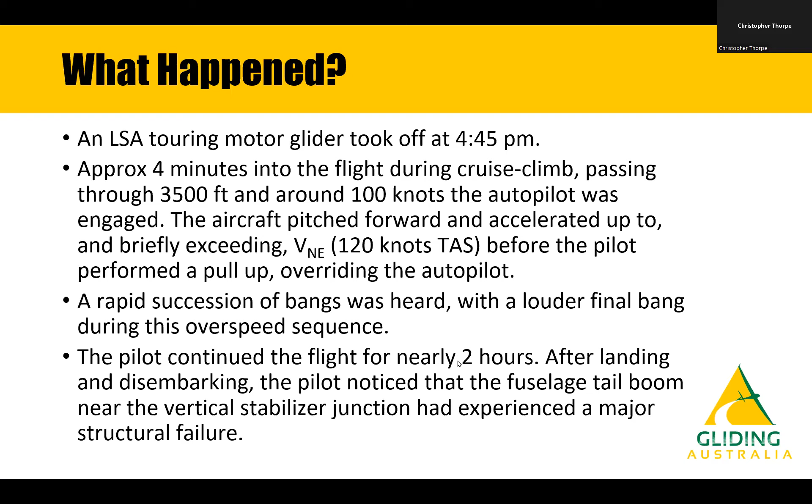The pilot did carry out a controllability check and decided to continue on the flight for nearly 2 hours. Once they landed at their destination, the pilot noticed that the fuselage tail boom near the vertical stabiliser junction had severe structural damage.

There's some photos from the accident report. The right-hand side of the aircraft is on the left-hand photo, so you've got a 45-degree diagonal tension crack, and there's compression damage on the port side on the right-hand photo. There's a little bit of damage that's hidden under the tail dolly on the left-hand photo, and the seam down the centre line just under the leading edge of the root of the fin has been split open as well.

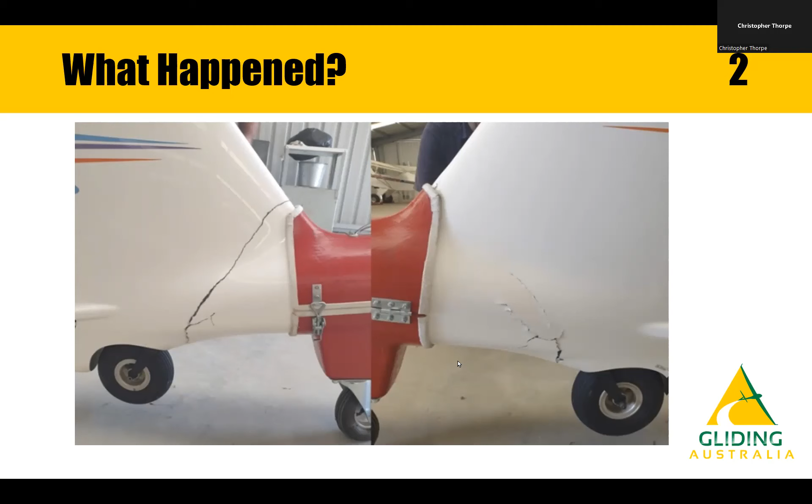So the sequencing: we have a lot of good data points from the autopilot, which also acts as a flight data recorder. Again, very unique in terms of sailplanes in Australia, that we have quite a large amount of this information, including control inputs.

At 16:45:08, the aircraft reached its peak speed of 121 knots. 2 seconds later, the pilot had reacted and pulled back on the control column, wound back the throttle, and reduced the speed. At this time, the aircraft yawed left. The autopilot applied right aileron, which was partially overridden by the pilot, and there were a number of bangs heard. Now, in the accident report, the precise timing is unknown. But I think we can nail that down to being at 16:45:10, or just a fraction after, and I'll show you where that occurred later.

After carrying out the controllability check, the autopilot was re-engaged and the flight continued. However, the pilot noticed that they had to continuously apply right-hand rudder to maintain straight flight from this time onwards.

Now, the pilot had only flown the aircraft a few times previously, so they weren't particularly experienced with using the autopilot and these long-distance flights. The aircraft landed safely at 6:36 p.m.

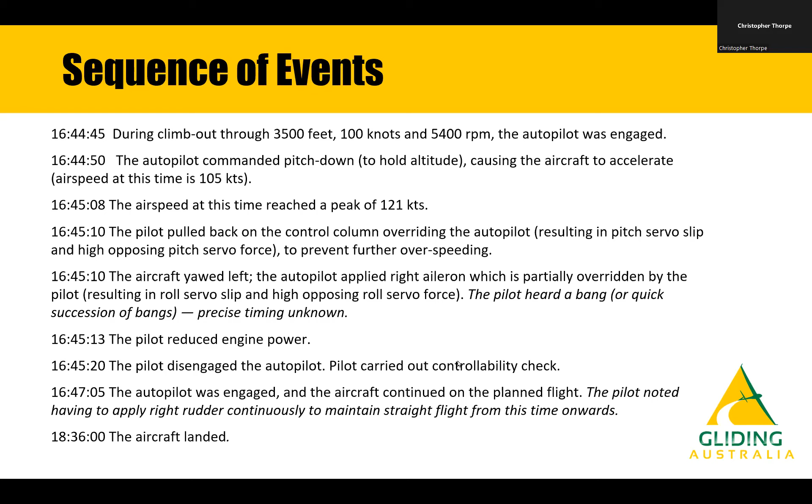So the results out of the investigation: the right-hand side of the tail boom failed in tension with that large 45-degree crack. The left-hand side of the tail boom had a partial failure in compression, and there was cracking to around 70% of the circumference of the tail boom.

The structure retained pretty good vertical stiffness, so elevator function wasn't adversely affected. But the lateral stiffness was very poor. The aircraft was quite flexible in the left-right direction, wobbling of the fin. There was video recorded in the cockpit during the flight with a 360-degree action cam, and there are periods of that flight where you can see the vertical fin physically wobbling left and right.

Now, there have been a number of flutter events that occurred on similar models from which this aircraft is derived. There's certainly at least one potential flutter event that occurred on this particular aeroplane, where unknown vibration occurred at high speed, and there are two other events which were attributed to the caps of the air brakes vibrating, but there might be something else going on in the background there as well.

Again, unknown vibration at high speeds. The speeds that all this occurred at are very similar to the speeds at which the flutter event took place.

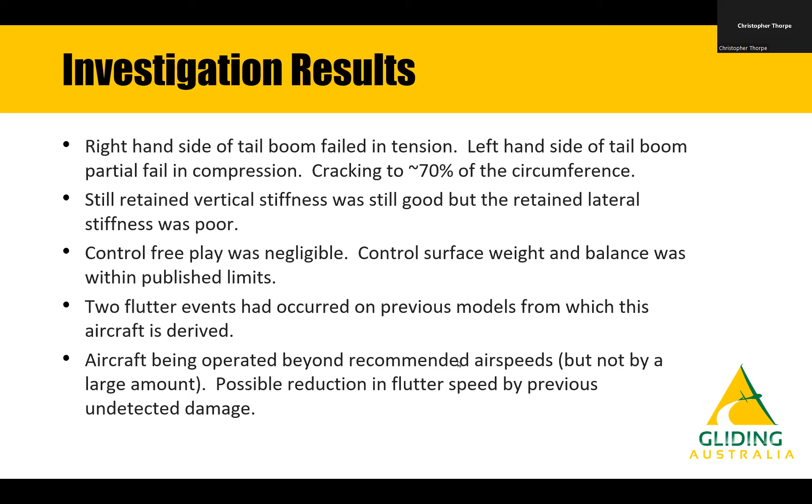So the recommendations out of the report are we should seriously look at the airworthiness of this aircraft type and the flutter events with the other aircraft. We don't have any details of those. They occurred outside the country.

Pilots should be advised that when an in-flight event occurs resulting in observable changes to the aircraft handling characteristics, the flight should be aborted immediately. I'll also add, if you hear a series of bangs in the airplane while you're flying, you should be seriously thinking about landing after that.

One of the features in the autopilot system did allow a maximum airspeed to be set, and that was not set in this particular example. In that case, the aircraft, as it approached VNE, would have done an automatic pull-up to try and prevent going through VNE.

The last recommendation out of the report was for the GFA to raise pilot awareness of flutter and to enhance their understanding of what this is and what can lead to this phenomenon. This is what this webinar is partly about.

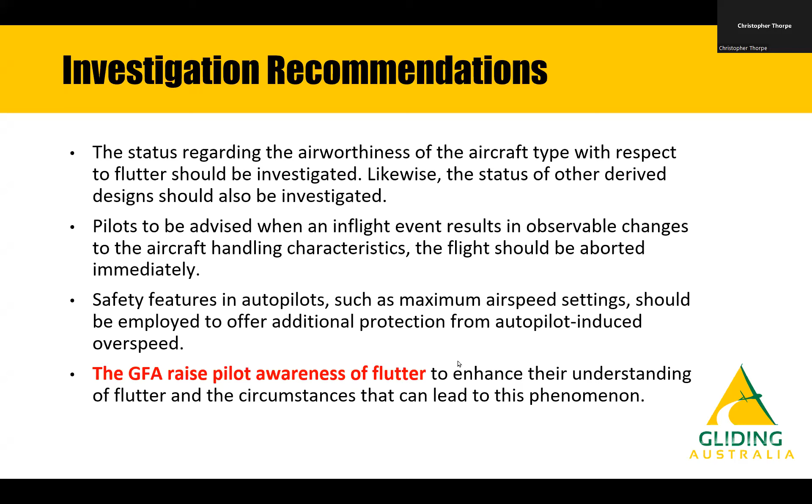So what the hell is flutter? Well, it's also known as the field of aeroelasticity. You can go to a technical library and get whole textbooks written on the subject of aeroelasticity. It's a very complex subject, and for the purposes of tonight, I'm going to be simplifying it greatly and making some generalizations. If you want to go deeper into flutter, there are quite a few good books written about the topic, and you can do your own research in that area.

But broadly speaking, flutter is an uncontrolled oscillation or vibration of the aircraft structure or a control surface in flight. It can affect anything with a hinge on it, so ailerons, elevator, trim tabs, rudders, flaps. It can affect wings, vertical tail, horizontal stabilizer, and even the tail boom under particular circumstances.

Every structure and each control system will have a frequency that it will want to vibrate at naturally. This is called resonance. And when you get that, you have very low damping effects. The structure wants to vibrate at that frequency. And mathematically, that frequency is affected by the distance of the center of gravity of that item from the point it's either rotating around or flexing around.

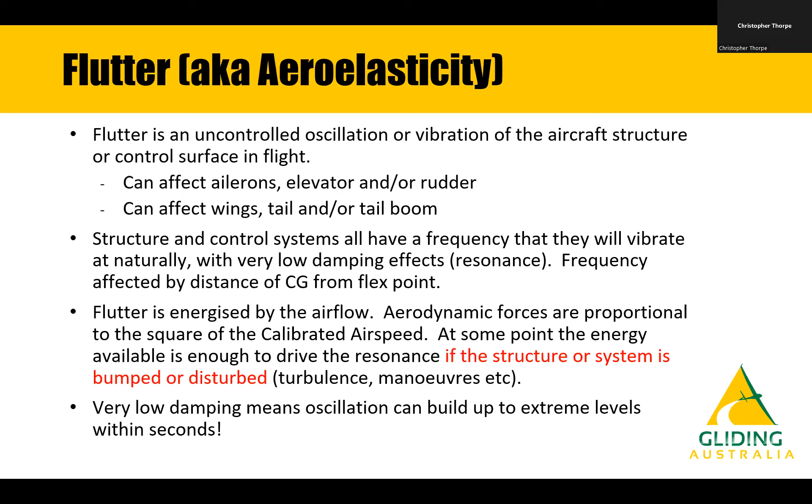An example of this came out of the Phoenix with the autopilot recording. This is a recording of the lateral acceleration as felt at the center of gravity. So it's not the accelerations being felt at the tail boom, it's at the center of gravity. It's not a particularly high resolution recording. It's probably only recording a data point every half a second.

To get a really good recording, we want to be recording maybe 10 hertz, 10 times a second. If what I think happened, we're probably seeing a resonance of around 3 to 4 hertz, and so you want at least 8 data points per second to capture that nicely. But we can see some background vibration or oscillation happening at around that 16:45 mark. The time major ticks are at 10-second intervals.

So at about 16:45 and 7 seconds, this background oscillation ramps up dramatically. And just after 16:45 and 10 seconds, there's a really big kick. And I think this is where the tail boom started to fail with the break in the structure. But you can see just from this very rapid buildup of vibration from the flutter.

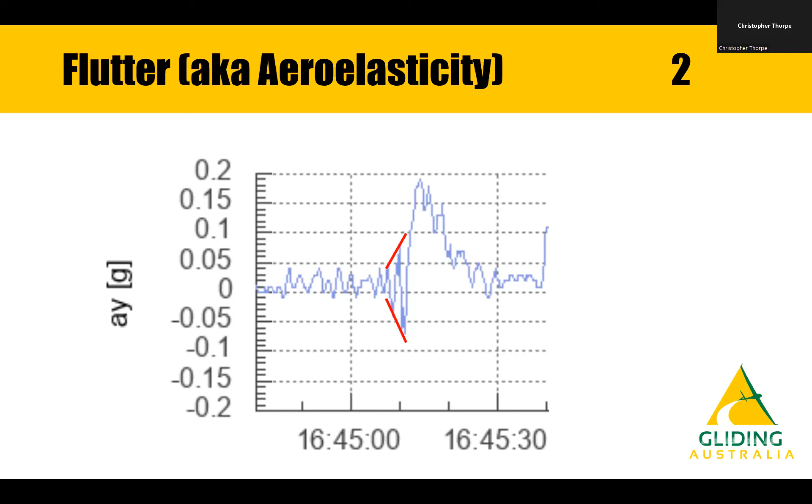Flutter and aeroelasticity covers a whole range of phenomena. We're going to simplify it down to the most common forms we're most likely to find within sailplanes. The first one is control flutter. This is the one you're most likely to encounter. It can affect anything with a hinge. So ailerons, elevator, rudder, flaps, trim tabs.

It can be caused by the control surface having the centre of gravity too far aft. So as you move the centre of gravity further away from that hinge point, you're lowering the frequency. The speed at which flutter will onset will occur sooner. You can have hinge free play. This allows the hinge point to bump up and down and gives an extra degree of freedom in the movement of the surface.

There is footage of an F-117 stealth fighter on the internet at an air show in the US, where it's doing a high-speed pass along the runway, where there's a brief buzzing sound, and then I believe the left outer wing snaps off. The aircraft does a series of snap rolls before the pilot finally ejects blue side up and safely lands. The aircraft then goes and crashes into some houses further away from the airport.

That was caused by the wear and tear of worn bolts in the aileron hinges. So it wasn't actually hinge free play in terms of the pivot, but the hinge itself, the mounting bolts, was being allowed to slop around and move around. And again, that buzzing noise was the aileron fluttering, and it lasted just under 3 seconds before the wing failed.

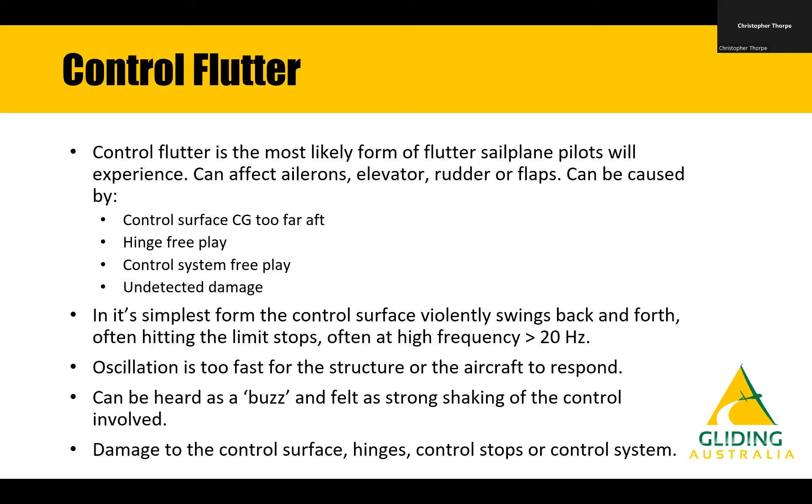As the rudder flaps, for the sake of argument, to the left with a large deflection, it's going to force the fin over to the right. As the fin bends over, it's going to start twisting nose to the back to the left again. That's going to increase the angle of attack and start trying to force the fin back to neutral.

However, by this stage, the rudder is now swinging back towards the right-hand side, and you get the situation not only where you have the fin bent over to the right with an increased angle of attack trying to return it, you've got the elastic forces of the structure trying to return it, and the rudder's now trying to return it as well. So this accelerates the fin back hard the other way, and it overshoots.

So you end up with the fin bending way across to the left, the rudder's to the hard right. It's twisting back around, which decreases the angle of attack. It's trying to get the airflow to drive the fin back to neutral. And the rudder still keeps on swinging around till it gets hard over to the other side.

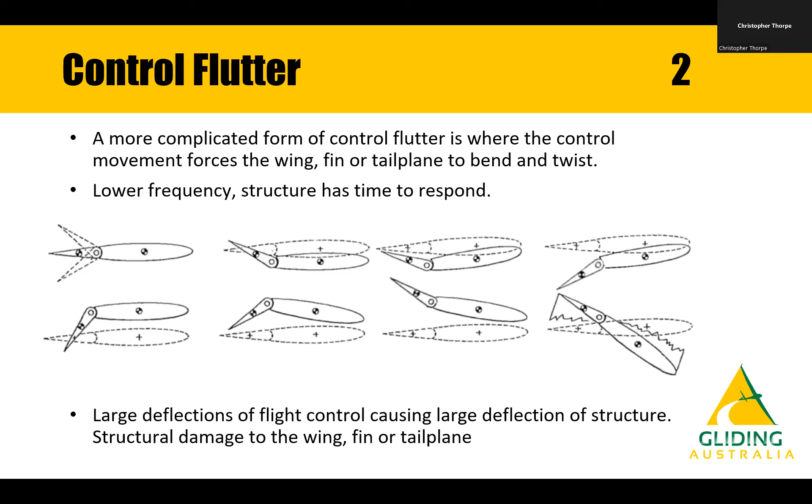We can also get another form of flutter. For the sake of argument, we're going to call it wing flutter, but it can also be applied to fin or the tailplane. Not so common to experience it in sailplanes, but we'll talk a little bit further about what happened to the Phoenix. I actually think it was something along these lines that happened to the fin on the Phoenix.

A lot of these structures on the aircraft can be referred to as what's called a cantilever beam, where it is exactly the same as if you have a ruler on the desk and you've clamped it to one end of the desk with your hand, and you've got a fixed end at the root end, and the free end is allowed to move around at the tip.

So what we refer to as primary wing flutter is both wingtips bouncing up and down together in a symmetrical pattern, just like you'd twang a ruler on a desk. The fuselage would end up bouncing up and down slightly in reaction. Mr. Newton had these laws of motion. One of them says every action has an equal and opposite reaction. So as the mass of the wing is bouncing up, it's trying to drive the mass of the fuselage and tail down. So you end up feeling in the cockpit a lot of vibration, like you're driving over a corrugated road.

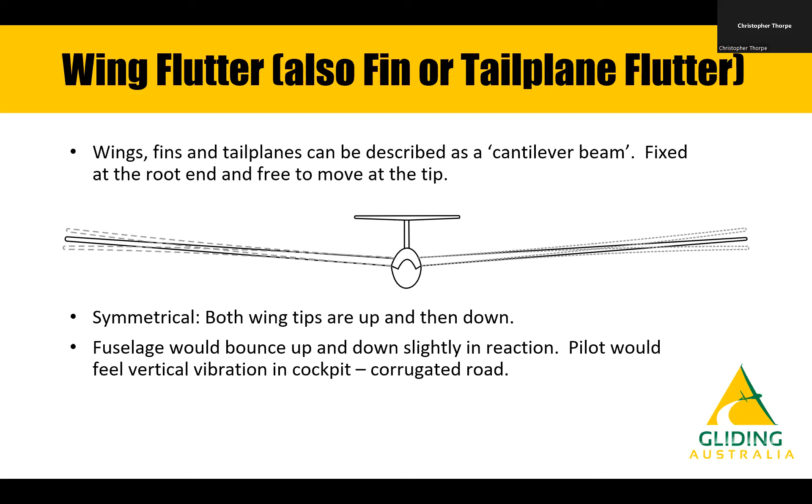And that's going to be in the order of frequency that you do your wing shake test at during the annual inspection. That kind of frequency is driven largely by the bending forces on the wing. So the bending stiffness of the wing, the centre of gravity on the wing. It's all about bending in that mode.

You can get a more complicated version where the controls interact with this. Now, I've used the same diagram as before, and it's pretty similar, but the real difference here is it's the surface, the wing, fin or tail, which is driving the motion, and the control surface is just along for the ride. So what I mean by that, again, working from top left to right, bottom left to right.

On the second image, let's say it's a wing, it is bouncing down and it leaves the aileron behind. The aileron has inertia, it wants to sit where it was in space. So it flaps up. It then, of course, helps drive the wing down a bit further, causing a fair bit of torsion on the wings, particularly at high speed. You get a lot of torsion from the ailerons.

And the cycle repeats. You then get the wing bending down, with a nose up twist to it, so that's getting an increased angle of attack, which is driving the aerodynamic forces to help drive the wing back up, along with the elastic stresses on the wing. As it starts bouncing up, the aileron has again got inertia, it's still travelling downwards, it flaps down a bit.

And of course you've got that situation where you've now got, on the top right hand side image there, an increased angle of attack. You've got the elastic forces of the wing trying to pull the wing back up into shape, and you've got the aileron deflected down, increasing the aerodynamic forces, forcing the wing back up, and of course it overshoots.

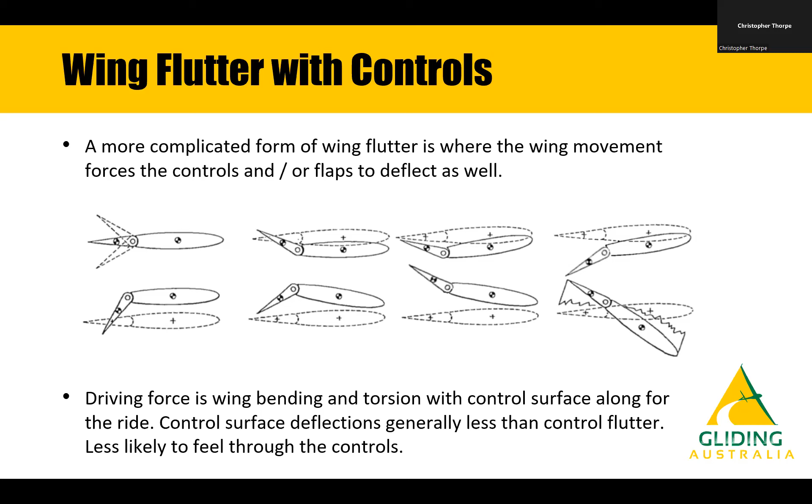What you end up with, particularly with the ailerons, is this anti-symmetrical mode. One wingtip is up and the other is down, and you've got that bit of an S-shape or sine curve to the wings. And the fuselage will roll back and forwards in reaction to this.

Something similar is going to happen if you get this kind of flutter mode happening with your vertical fin. As the fin's rocking around, it's going to have the rudder trying to remain stationary in space and start flapping around a little bit behind. It's the motion of the mass of the T-tail and the motion of the fin which is really driving the flutter event, and the rudder's along for the ride. I think this is what actually happened with the Phoenix.

Generally, with this anti-symmetrical mode in gliders, this is the first mode you tend to encounter in gliders. We've got these long, slender wings with thinner and thinner airfoils. We don't have a lot of torsional stiffness in these high aspect ratio wings with thin airfoils, and this mode is dominated by twisting more than bending.

And you get that funny shape where the wing is trying to bend up but then bend back down again, because you've got this control reversal effect. As the aileron is going down, it's putting so much twisting force on the wing, it's lowering the angle of attack to the point where you're getting negative lift rather than positive lift.

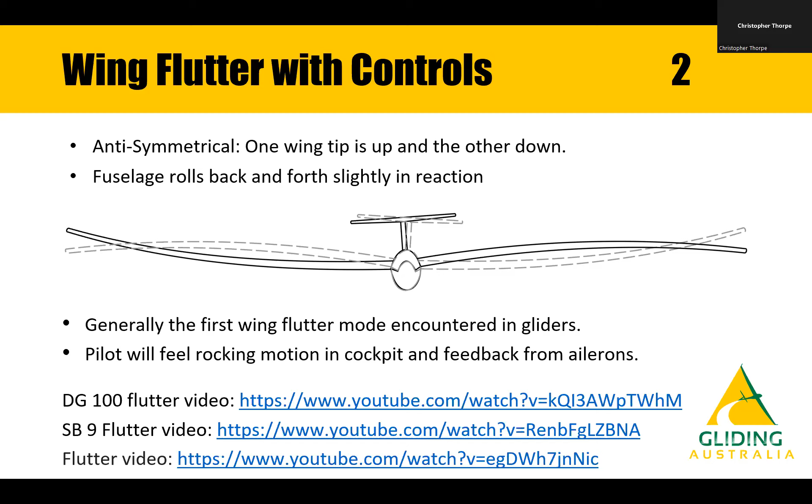There's a number of videos that I've listed there. I will show them. I'll show a segment of the SB9 flutter video first. The SB9 was a, excuse me, I'm just messing things up here.

It came out of the Akaflieg in the 1960s. It was a very early fiberglass glider. It was designed around the strength of the wing rather than the stiffness of the wing. So when they first flew the SB8, which was the first model, they encountered some pretty severe flutter effects very quickly. The wing was quite floppy.

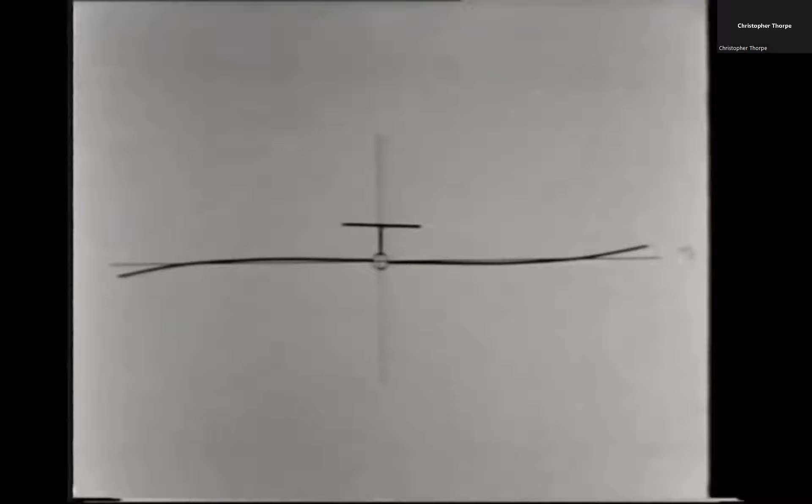They built a new version, kept the fuselage, put longer wings on it, which was the SB9, and I believe this is the first version of the SB9 with these very long wings and very low stiffness. You can see what happens here. This is a brief animation of the expected motion of the aircraft. And you can see the response of the fuselage rocking around as the wings go through this crazy S shape.

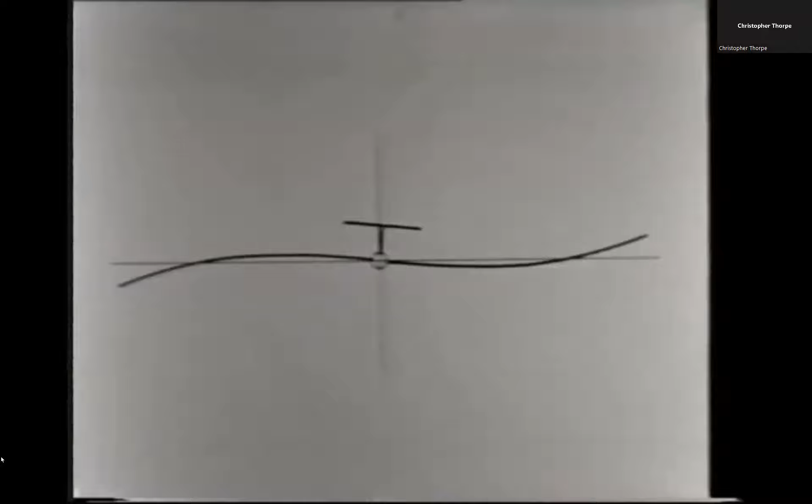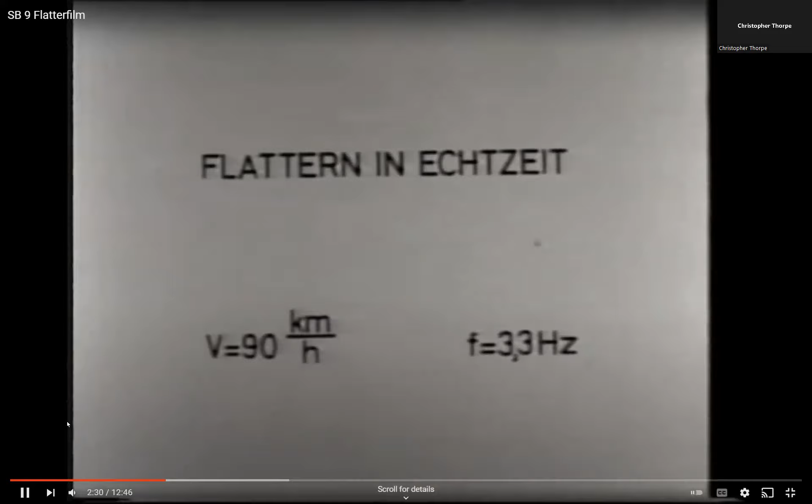Because this aircraft has very flexible wings, whilst this is a great teaching aid, you can see that the flutter is expected at 90 kilometres an hour, very low airspeed. And because it's got low stiffness, you've got quite large amplitude. So it's very good for showing what's going on. Probably not so good for a real world example.

I'll just keep this playing for a little while longer. There's another segment to this where they do it in slow motion. If someone can read German, they can let me know what that means. I think it's about 3.5 times slow motion. And you can see the input of the ailerons. You can see the flexing of the wings quite clearly in this slow motion footage.

I'll go to the next video. This is a DG. This is a more realistic example of what you can expect in real life. I don't want to experience that ever myself, quite personally.

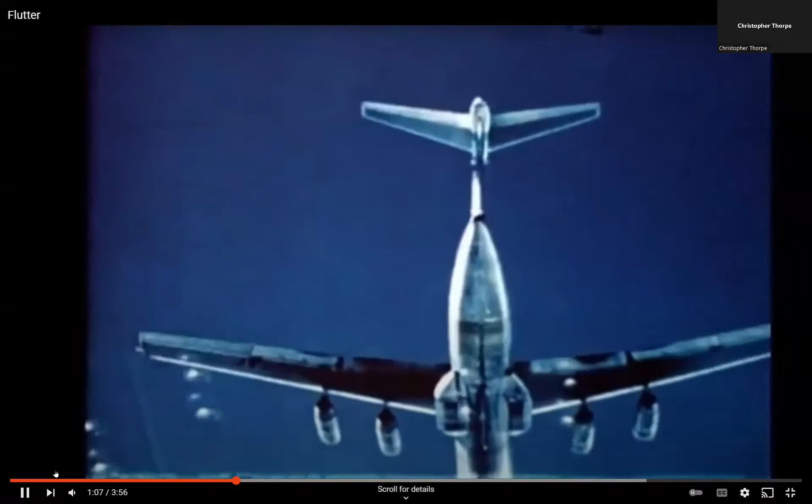And pause that there. I need to go to a new timestamp further on. There's quite a bit of odds and ends shown on this particular video. And about here.

There's a variety of wind tunnel tests. One of the problems you get with military aircraft is they like hanging stores and heavy things on the wings, and this moves the mass further outboard and sets up all sorts of interesting flutters. Now that is very similar to the C-141, and you can see the twisting and bending of the vertical fin there. There's an example of horizontal tail flutter.

That's primary fin mode with the bending and twisting. That's an interesting one of a winglet. So I haven't mentioned winglets so far, but you can get flutter in winglets as well.

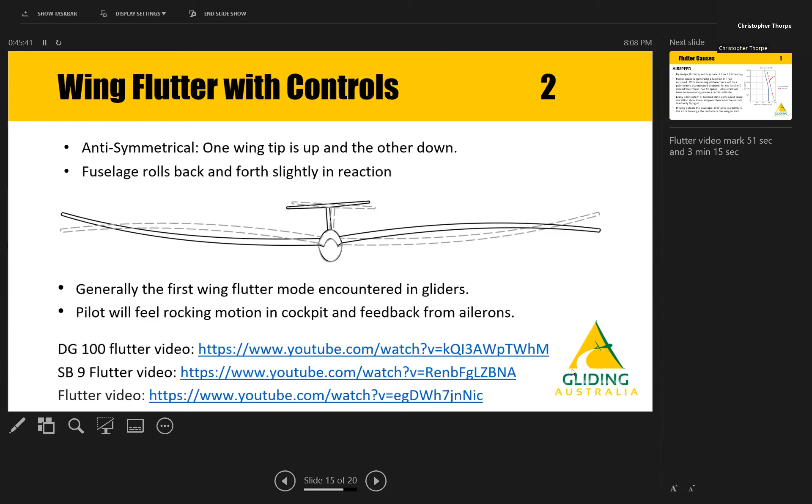So flutter causes. Primarily airspeed. Flutter is a high-speed event predominantly. By design, you want to have your flutter speed somewhere in the order of 1.2 to 1.3 times VNE. Flutter is, generally speaking, a function of true airspeed. So when you have increasing altitude, your indicated airspeed corresponds to a higher and higher true airspeed. At some point, you're going to cross over the flutter line.

So aircraft fitted with an oxygen system will have to have a table next to their ASI showing a decrease in VNE above a certain altitude. Most commonly, it's 10,000 feet. Some aircraft I know have it starting at 8,000 feet.

Above 10,000 feet, you're supposed to have a decreasing VNE. So those people who have the good fortune of flying in wave conditions and want to go racing along the cloud line at VNE, yeah, be careful with that one.

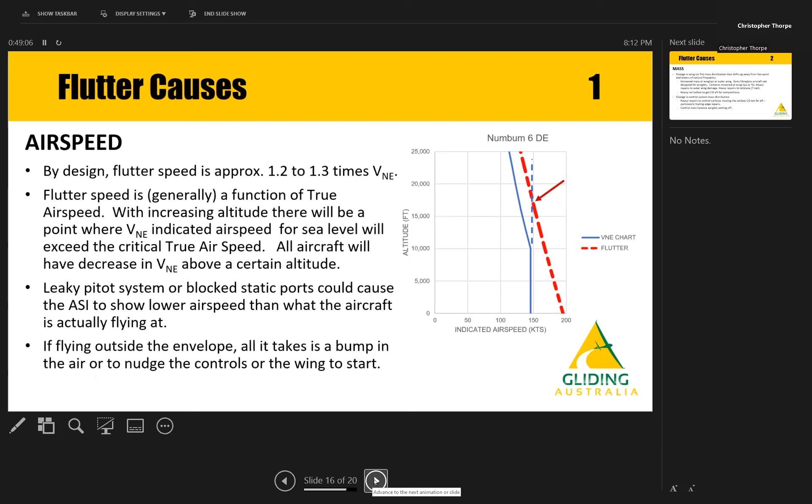Other causes of flutter: change in the mass distribution along the control surface, change in the mass distribution along your wing, fin, horizontal tail. Anything that moves the center of gravity of that structure further away from the hinge point or the flex point will lower that resonant frequency.

Most common one of that is increased mass at the wingtips, winglets, cameras mounted at wingtips. Heavy repairs, someone's gone and crunched up the winglet and crunched up the wing tip during a ground loop or something like that, and you've got a big mass of resin out there.

Heavy repairs to the tailplane for a T-tail glider moves the mass of the vertical fin further up. One that bothers me for some of the aircraft with pencil tail booms: putting a lot of lead weight down the back of the tail boom to get your CG right for competitions. Yeah, in theory, that's going to lower the resonant frequency of the tail boom. So it's quite possible to start getting flutter of the tail boom bouncing backwards and forwards under certain circumstances.

A really common one is people doing repairs to trailing edge damage and then having a lot of resin and extra glass back there, which moves the centre of gravity further back from the hinge point. It's absolutely critical to go and do the weight and balance on your control surface after you've done a repair. That's why it's now considered a major repair. You've got a high risk of changing the mass balance of the control surface.

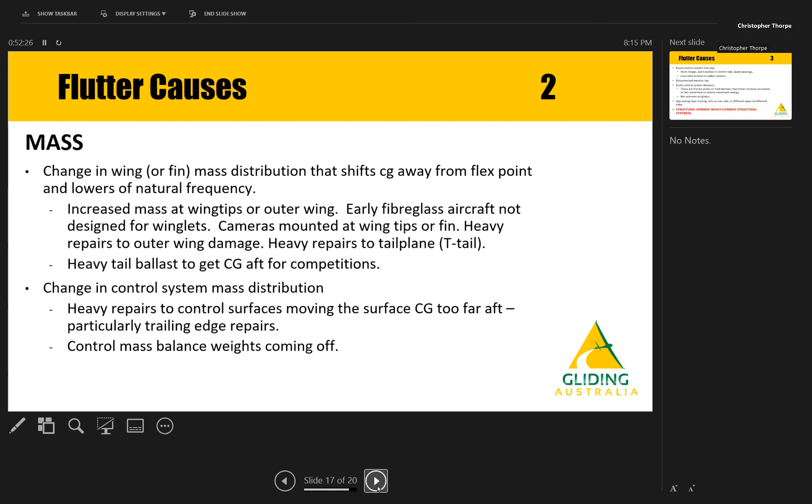Other flutter causes: excess control system free play, worn hinges, worn bushes in control rods, faulty bearings. I've already mentioned the story of the bell crank mounts with free play or worn bolt holes in those causing problems. For those people with old school gliders with an elevator trim tab, yep, if they become disconnected, you've now got a flappy bit driving another flappy bit. That can lead to severe problems.

I know of a C-130 Hercules where they had an aileron trim problem. They were operating well away from base. The air crew decided that they would simply disconnect the aileron trim and that it would remain happily out in the airflow, streamlined with the aileron. Note you had a flappy bit that now had no resistance to its motion, driving another flappy bit, and they ended up with aileron flutter.

Faulty control system dampers. You don't get too many of these in gliders. There are a couple of them kicking around. These are either friction plates or a fluid-filled container which acts as a motion damper. It's designed to take energy out of the motion of the controls, not necessarily give you any control resistance, but increase the resistance to fast movement and absorb some of that energy coming out of the system and damp the system. They can have problems, particularly if some of that fluid on the fluid dampers leaks out.

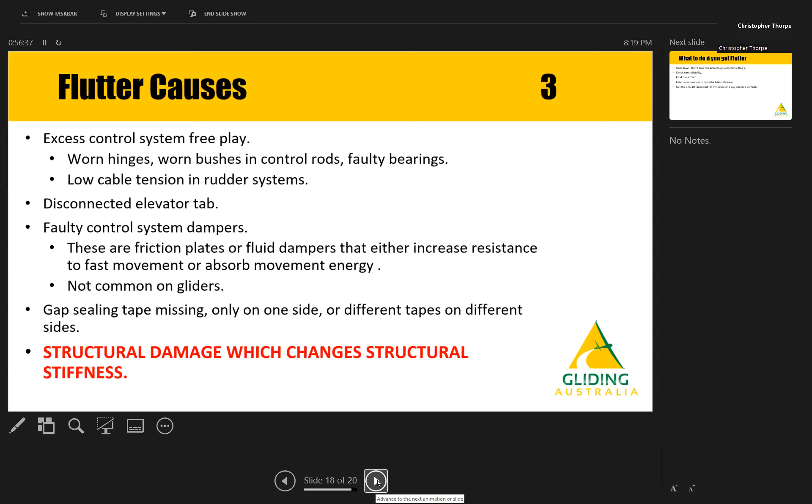So what do you do if you experience flutter? Slow down. Flutter is a high-speed event typically. Slow down carefully. Don't load the aircraft up with sudden Gs. If you've already got a lot of stress being applied to your aeroplane, you don't want to be adding a lot more stress. Don't go and pull 3 or 4 G as you pull up. Step 1, check controllability. If you still have control of the aircraft, consider landing. If you don't have control of your aircraft, consider stepping out with the parachute.

Land the aircraft. Enter an unserviceability into the maintenance release. A major unserviceability is what I should have written. Get the aircraft inspected to find the cause and for any possible damage. By design, and it's in CS22, the aircraft is supposed to be free from vibration in all phases of flight with the exception of pre-stall buffet. So if you've got funny buzzy noises or funny vibrations coming through the airplane at high speed, you want to work out what's going on there. It's a damn good sign something's not right.

Now, you might have a little bit of loose tape, a little bit of loose control seal that's making the buzz. But if you're feeling strong vibrations through the controls or through the structure, then that's a real problem that needs to be resolved very quickly. And we should land immediately and resolve it. Don't say, oh, it's nothing, and keep going.